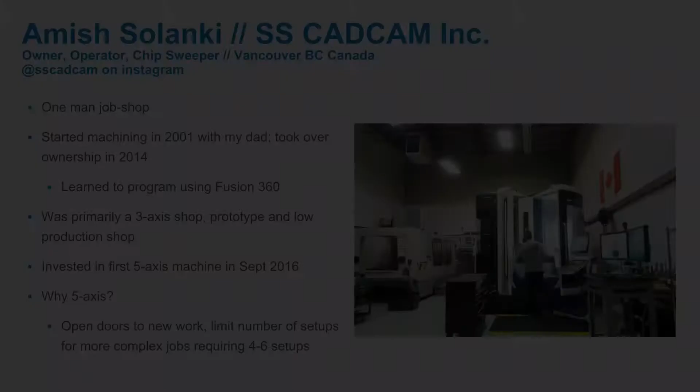I run a one-man job shop. My dad started the shop back in 2001, primarily just a 3-axis shop. My dad's first machine was a Haas VF7, which you see in the background there. That still runs to this day and is still my workhorse. I worked about 10 years with my dad. Never went to school, learned everything from him, was pretty much the shop rat. I didn't do a lick of programming.

And then I decided to take a bit of a leave from the industry. I just found the shop wasn't progressing where I wanted it to go, so I went into a completely different industry. And then after about 5 years, I came back, ended up taking over ownership of the shop, and then realized I had to learn how to program these machines. So that's where Fusion 360 came in for me. I started learning that in about 2014.

And then about a year and a half later, while running the shop, my biggest thing is we're primarily a low-quantity prototype shop. The amount of multi-operation parts that we were doing was just killing my machine time. I was just setting up and setting up and setting up, and just being able to actually get my machines running was taking more effort. So in early 2016, I decided to make a pretty big jump up, and I bought the DMG monoBLOCK, and that came in about just over a year ago.

And that's kind of where I am today. So I've had the machine just over a year. It's definitely opened up the doors to a lot of different work that I would never see, and also really been able to optimize the type of work that I've been doing in the past. So that's been a bit of a nutshell. And Phil, if you want.

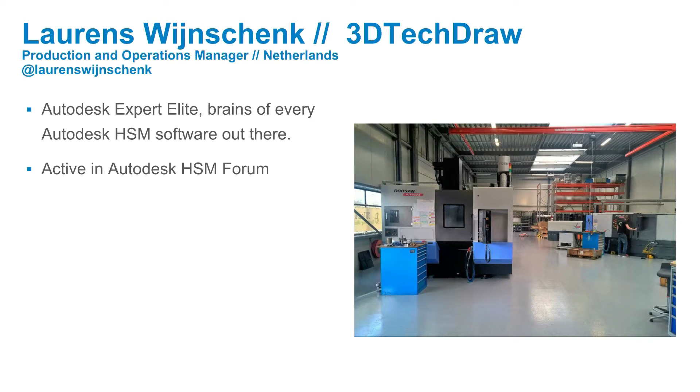We build very high-end aftermarket parts for Harley-Davidsons, and we bought our first 5-axis because everyone in the bike game has a 3-axis, maybe a 4-axis, so designs are all the same. So to really push our brand ahead of everyone, we had to make really fancy designs, and to make those designs, we went 5-axis, and that just throws you above everyone.

But mostly, as you can see, we bought it because it makes really sweet Instagram posts. It's all about the followers.

And I just use Fusion 360 for everything, for all the designs, all the 5-axis work, everything. That's about it. You do everything from design? Yeah, I personally in our company do all the design, programming, and manufacturing. So I have very long hours.

Awesome. Great, thank you. Let's... 9 minutes later. Yes? Where were you stationed? Vancouver, British Columbia. Yeah.

So one thing I try to let people know who are new to the 5-axis game is when you go to trade shows, they're a bit at fault, because every single 5-axis machine you see is moving in every single direction possible to make a hole. And sometimes I don't understand why they don't just drill the hole, but they've got to get the table moving in every different direction. So when you first see that, it is a bit daunting.

I know when I first saw it, but the more I spoke to people, the more they told me that you're generally not making the table move that much. It's primarily a positional game, and maybe 5-10% of the work requires a little bit of simultaneous work. So that's probably the biggest thing people in 5-axis are worried about.

For me, the biggest thing about 3+2, and one of the reasons you want to do it, is to lower the number of setups, saving time, and limiting the operator's interaction with the parts. In my shop, it's just myself, but I have some jobs that require sometimes 6 different setups, and if I'm doing that on my traditional 3-axis machines, which never had a spindle probe on them, you're picking up the part 6 times.

And granted, you could probe a part perfectly every single time. If you forget to lock that vise on the 7th setup and your part moves, you're starting from scratch again. So the nice thing for me with a 5-axis machine is your part's locked in. You can generally do most of the work at once.

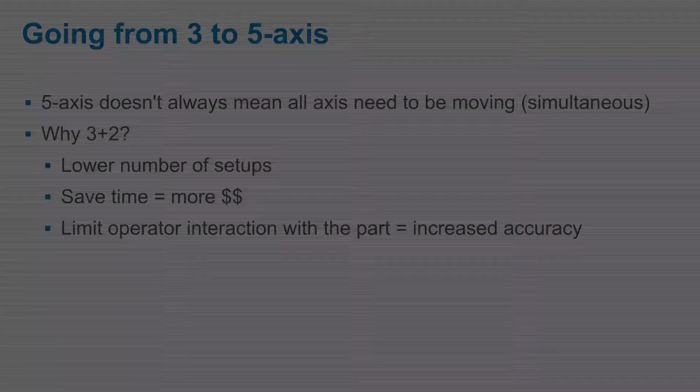If you're wondering how to 3+2 in Fusion, it's actually quite easy. In almost every geometry tab, there's an option for tool orientation, and it's as simple as clicking on a face and setting your Z from there. The machine control takes care of the orientation offset, and it's really hard to explain.

I never quite understood that when I was first getting the machine. I'm thinking, well, the table flips 90 degrees, the Z height's changing. How is that all working out?

Laurens, you kind of explained it a little bit yesterday when we were talking about the best way to explain that. Kind of when you're picking your Z offset and rotating the table, and then the control takes care of it all. Yeah, of course, most controls now just have the dynamic work offset or something similar.

For the Heidenhain controls, it's called cycle 19, and for Fanuc, it's G68.2. Most controls you buy nowadays, you can buy the option or it's built in. Most machines you buy that are 5-axis at least have that version. Not all might have TCP, the tool center point control for 5-axis, but that one's in most any machine now.

So orientation is all standard in Ultimate? That's a good, yeah, it's not non-standard, right? Yeah, it's just in Ultimate now.

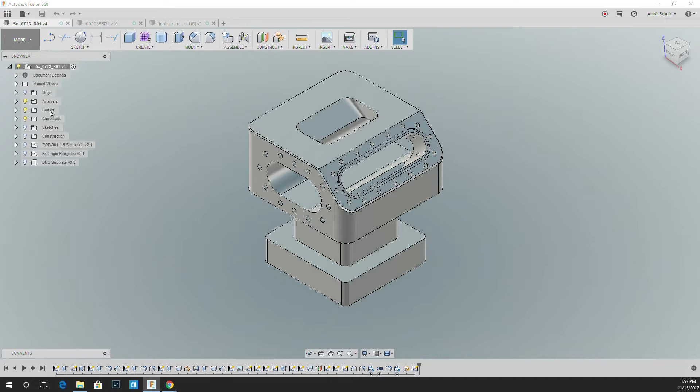A lot of issues I've sometimes had is trying to get into odd angles. I'm going to go to Fusion here quickly and just show a basic part to give an example. I'm working kind of backwards here. My Space Mouse was rolled upside down.

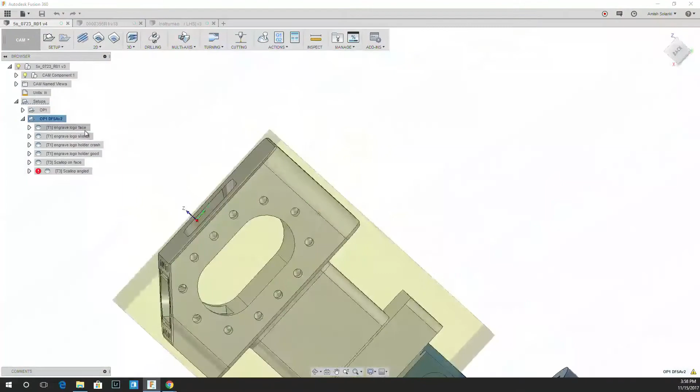For example, if you were going to engrave this logo here and rotate the table at 90 degrees, I'd be using a ball nose, and for me it's not ideal to use a small ball nose right on the tip of it, so I'd like to kick the table over a certain number of degrees. Common practice is really just to create a sketch if you wanted to use a different angle. I created a sketch here on this plane, and for this logo I've used my tool orientation.

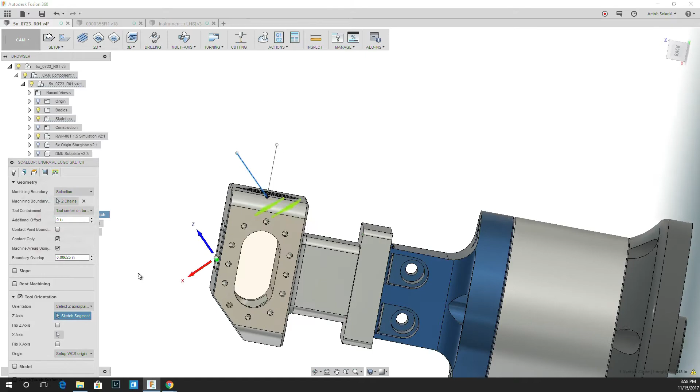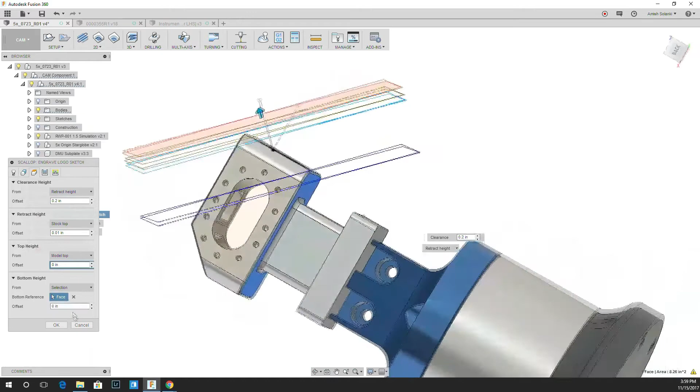I'm going to move this on this side so I can see it better. So you just pick your Z-axis. Normally you'd pick this top one here, and you can see the Z-axis pointing at 90 degrees. But if you wanted to use the side of the ball nose, that's the sketch I would pick, and then just press OK. It's just going to process, my laptop's not the fastest. And that puts the tool at an angle.

The problem with that is if you have a part that requires you to draw a lot of sketches, I find it takes quite a bit of time. So my tip is I've created this almost star globe, and I've used it quite a bit. All it really is is a bunch of different sketches on different planes, I'll turn them all on here. It's positioned in lines in almost all directions that you need, so you can choose the one that you need.

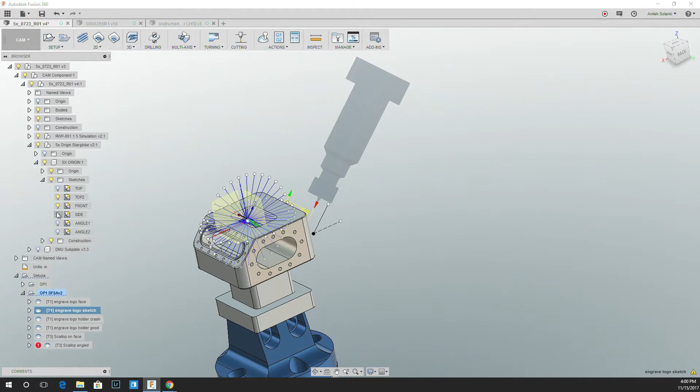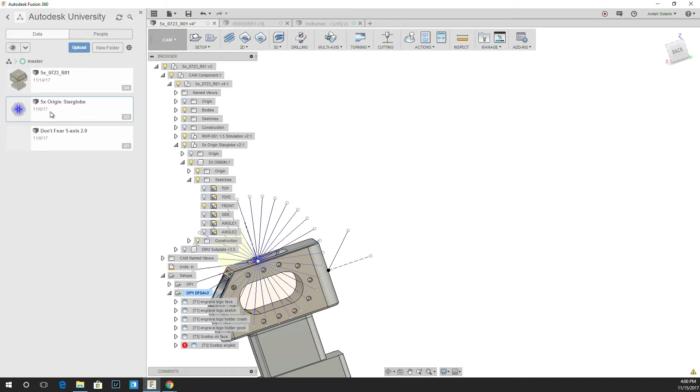I'll zip down here and turn on the front one. Is that a linked part that you inserted? Yeah, exactly. I've pretty much created this one model, and that's what makes it quick for me. I just import it right inside; it doesn't need to be in the middle of your part. I just put it anywhere, and I find it makes it extremely quick for me to pick an angle.

So if I simulate this one here, you'll see I picked this angle, and the tool holder ends up crashing into the part. So it's really quick just to edit, pick the next sketch geometry down, let's try that one there, and then the tool rotates away from the face. So that's my little tip that I've used quite a bit.

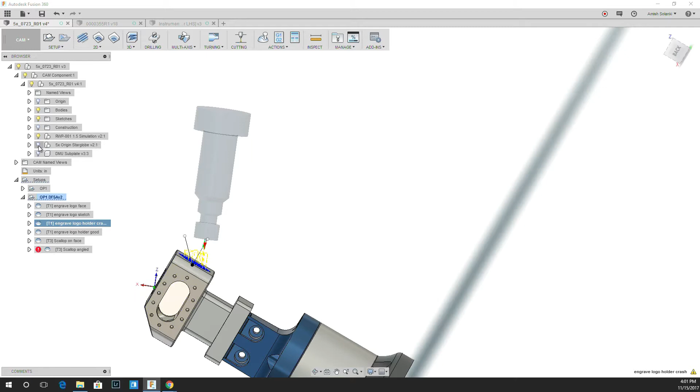I had a very similar option for doing these radiuses on the back side here. I'm not going to show too much of that, because Lawrence is going to show some neat 5-axis simultaneous work on the back of that part. So I will head back to, yes?

Not really, as long as it's not like directly down from me. 15 degrees is even better. It also depends on the size of the tool that you're using. Yeah, as long as you're not kind of directly down. I mean, you do a lot of small tooling, right? Yeah, 15 degrees is like... Yeah, exactly. That's kind of the big thing that I use.

On a small tool like that, I don't know, what do you think? 5 degrees? It also comes down to your clearance and stuff, right? Like if, for example, if you're trying to go on the back of that wall there as well. Yeah.

I'm just going to show a couple examples. These are strictly 3+2 examples of parts that I've done in the past. This is actually one of the first parts that I think I did about 2 or 3 months after I got the machine. I'm actually pretty good friends with the Sandvik sales rep in Western Canada, and there's a local aerospace company that uses a lot of their face mills, and this one they specifically wanted, but they wanted it with through coolant capabilities, which Sandvik doesn't do.

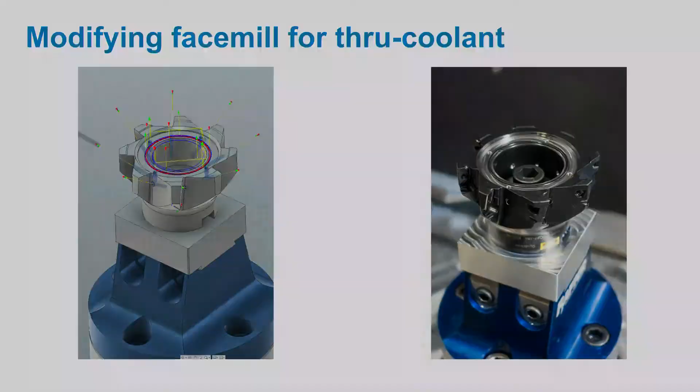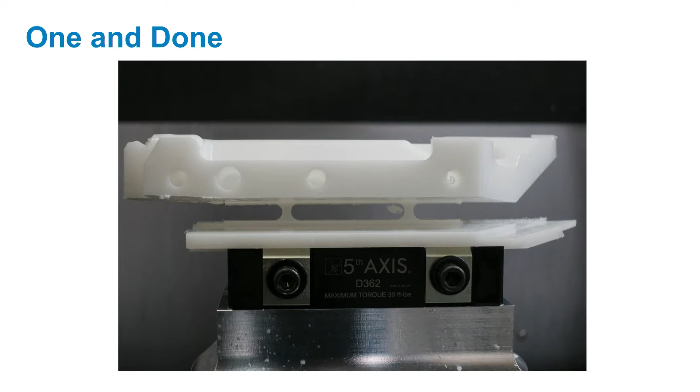This is the job that I did for Boeing. There was quite a bit of these plastic parts that's used on their wing spars. These clamps come together and they inject like a polyurethane through those holes that compress on it, and then these clamps come off. Unfortunately, I can't show too much of the part, but there is quite a bit of surfacing on the top and on the back side, and there was about 40 parts and every single part was different, so I didn't feel like doing work holding for every single one. So this is almost a kind of a one and done part.

Those tabs were created using the tab function in Fusion. When I cut off, the back side wasn't important, so I was able just to clip it off and then use some sandpaper to kind of finish off the back side. Again, a fairly simple kind of work holding strategy, but for a fairly complex part that made it pretty easy for me.

This was some aerospace panels I did, which can't be done easily on a 3-axis machine. You can kind of see there is a chamfer part here, and then this is the part flipped over, and then the inside was chamfered. It made it easy. I didn't have to surface those in. Actually, a nice thing is when you're doing deep pockets like this and it fills up with coolant, you can tilt your table and get the coolant out, which is actually something that's quite nice to be able to do. Even just getting all the chips out if you wanted to, for finishing the part off.

So these were actually for a Sikorsky S76 instrument panel, and these are the lower panels. That's the finished part there. The bigger main panel was done on my VF7. That was about a 15-hour runtime on that slow machine, and there was a bit of surfacing on the angle on the far part right over here. I think I don't have it in my slide, but this is what my customer sent me, and that's the finished part there. So the two lower panels are down here, and then the main panel up there, which is kind of neat.

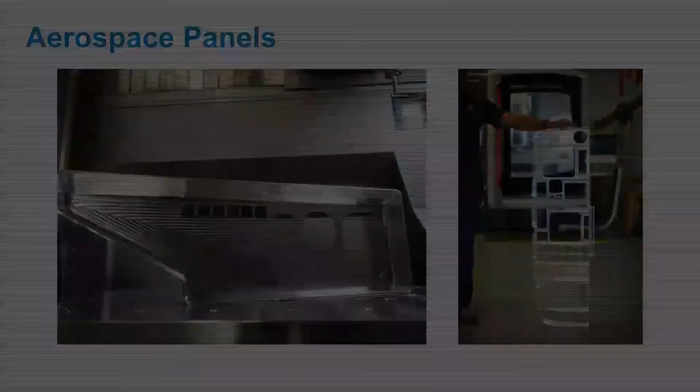So again, going back to the small parts, they're nothing absolutely crazy, but just not having to surface that chamfered wall saved me quite a bit of time just taking an end mill to finish that off. And the work holding on that part was pretty much just a sub table that I made, and then I did all the fixturing primarily with bolts and some aluminum clamps to hold it for the second operation.

So yeah, that's that part there. And then these are some large molds that I made for the fuel cell industry. They were being done in another shop, and then they changed the models for them. And then the customer came to me. It started with a fairly large slab there, which is dovetailed, if you're wondering how it's held.

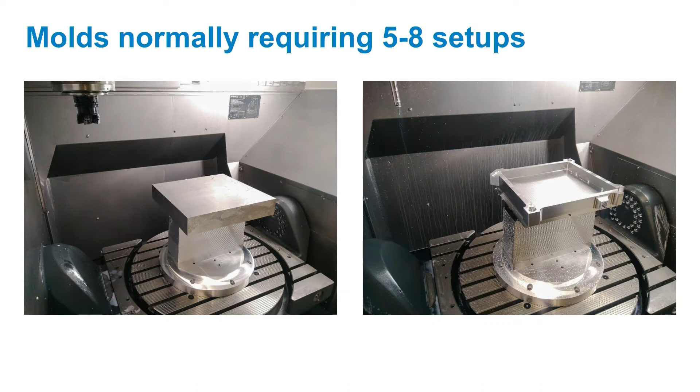And then usually I think it would be about 5 to 8 setups to do, not that part, but there's the bottom and the top part of the mold, and you can kind of see on the one mold there's quite a bit of fixturing around the side, and you can see all the toolpaths around the side of it. There's even chamfers located on these clamps on the side that if you were to put on a 3-axis machine and hold it up, you'd surface them in. I was able to obviously tilt to the right side.

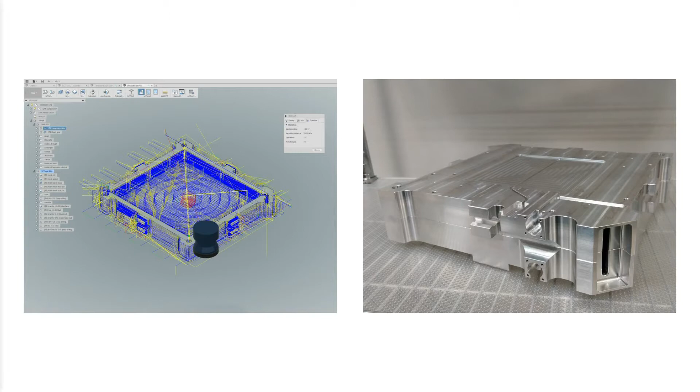Let me pull this up here. This is just to give you an example of how quick some of the chamfers were on all the sides. And I'm running real time here.

So again, I didn't do a big quantity of these parts. There were about 6 of them each. I think the total runtime on them was anywhere from around 2.5 to 3.5 hours to complete. But once it was programmed, it was nice to be able to set it up and then go home and take a nap and then go back to work again. So,

and then this last part, I don't know how many of you follow me on Instagram. This is a winglet that I had to design for unmanned aerial drones. I actually got one of the parts here. I'll pass it around. Just be aware it is quite sharp on the back side here. It finishes off at around 4 thou, so it's got a sharp edge, so please don't cut yourself, John. And this was quite an interesting part.

In the video I posted on Instagram, I do show some 5-axis simultaneous toolpaths, but that part was actually done completely in 3+2. It was quite tricky, at least for me, figuring out the work holding for it. It was done out of a solid block. I had to eventually break the part off, and you'll see it's quite a surfaced part.

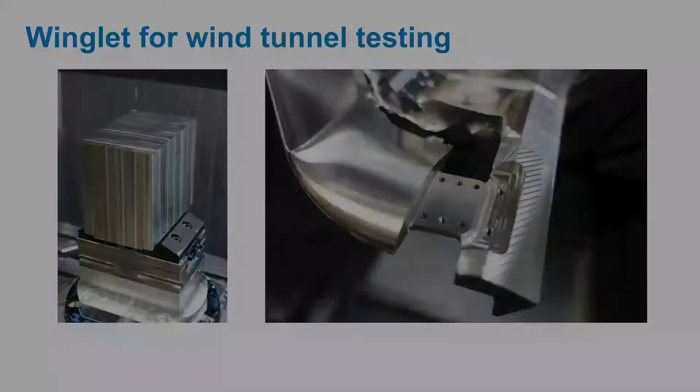So what I ended up doing was I left a bit of the material on this side here. These were 2 threaded holes that were in the part. But this side here was actually curved, and the back side was flat. So I ended up just cutting a piece of aluminum on the back side that I bolted onto the part. So when I machined the back side, it was still supported. And so that side was, in a sense, completely machined off, but still supported. And then I machined the last part of the tip of the wing off. So again, fairly complex.

Have all of you seen the video on Instagram, or probably not? Yeah, it was kind of an interesting little part. So there was left and right. This is not how they manufacture the part at all. It was primarily just designed for them to put into a wind tunnel test. And then I'm not exactly sure how they do the final manufacturing for the part. That's stuff the Army doesn't usually want to tell you.

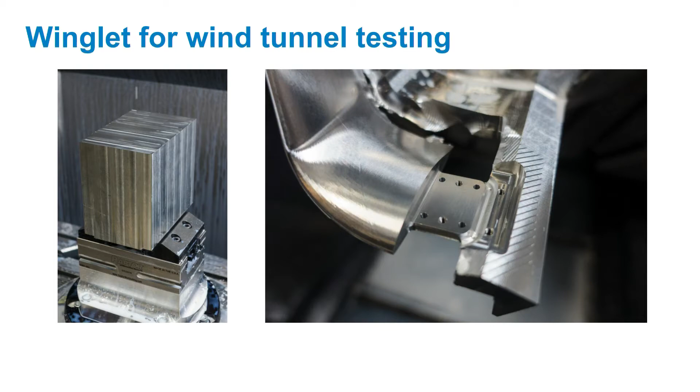And that's it for me. Phil, you want to go? Yeah. So we'll bring your stuff up here. I don't know how this works. Press it down to continue. Yeah. Oh, fancy. There you are.

Yeah, so I'm just going to talk about some of the work holding I use for 5-axis stuff. I'll start with basic things: vices, centering vices, standard chucks, fixture plates, and clamps, and then I'll go into a little bit more. This is just a simple lathe chuck. Everyone's got one collecting dust in the corner of your shop that someone probably crashed on a lathe. So I use them for mills. Great, simple. Next, just a standard vise.

This is actually a part I designed, and I didn't actually realize how big it was until I ordered the material, and then I realized how small my machine was.

And if you're wondering, the corners, when it rotates, do clear the probe by 50 thou. So I lost a couple years of my life on this one. But you can see, you can throw, if this even works.

The material was 6061 aluminum. It was 24 inches by 12 inches by, I think, 5 inches thick.

How on earth do I do? You did not share with me. What? Yeah. How do I share it with you? Not sure what you've done here. I've never used PowerPoint or Google Slides before, so. Oh. You know what? You're going to have to give me access from your account. Yeah, whatever. Figure it out. Let me move it over. Okay, well, I'll come back to videos. Oh, no, that's fine. Oh, jeez. Why don't you come back to your videos after? Yeah, I'll figure everything else out, and then we'll come back to the fun stuff.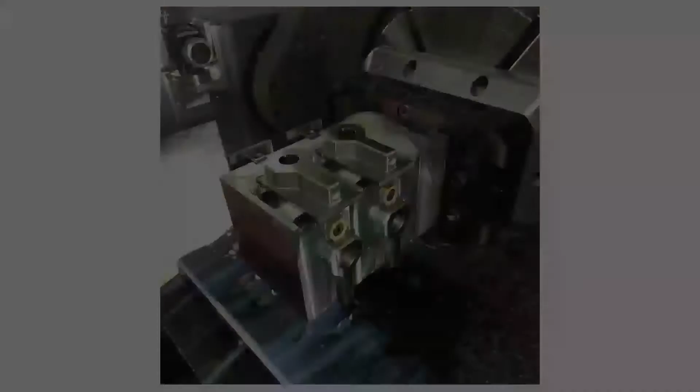And then there's just standard Mitee-Bite fixture plates, pretty standard 3-axis stuff, but if you have a 5-axis, why not just rotate that 4 or 5 times around like a tombstone, and then just make a small one you can hold in a vise. So this is just fun, creative stuff I like to do. And that way, you can get all the way around it, do your 5-axis work, and it looks really cool.

And then this is just your basic clamps. We made a wheel, this is all very basic stuff, but you gotta get stuff done.

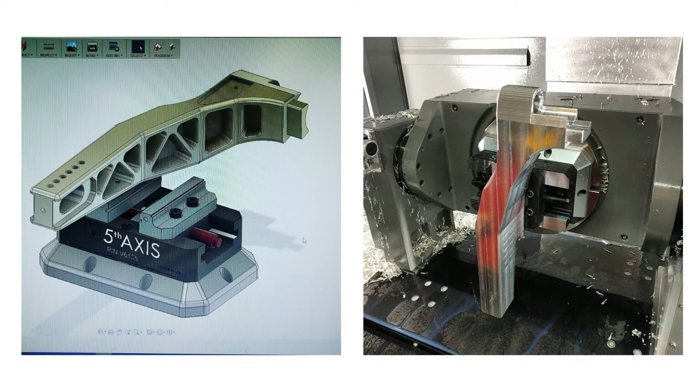And then there's dovetail stuff, classic 5-axis work holding. You got dovetail vises, the little fixtures, and then multi-part fixtures that I love to do. So this was actually one of the first things I ever ran on a 5-axis. And this just shows kind of the power of dovetails. This is a rather big piece. That's 21 inches long. And we held on to, I think, a 1-inch dovetail, 80 thou thick, and did the whole thing all the way around. And there's no chatter anywhere, which was mind-blowing to me.

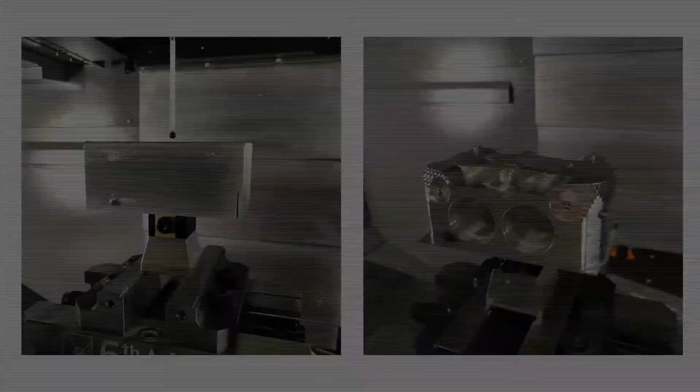And there's just another example of just a small dovetail fixture. It's just a 1/2-inch one from 5th Axis, but it shows you this is like, I think, a 6-inch wide piece, holding onto just a 1/2-inch dovetail, and it's the same. That's not chatter, just so everyone knows. So you can do big pieces holding onto barely anything, and surprisingly good results.

And there's another. And it's just showing, if you look around, you can get all sides. That's one I made. Oh, that's this contour of multi-axis tilting. I use it for everything because it looks cool. And then I can tell people that my parts are very expensive because they're hard to make, even though I don't need to use that toolpath.

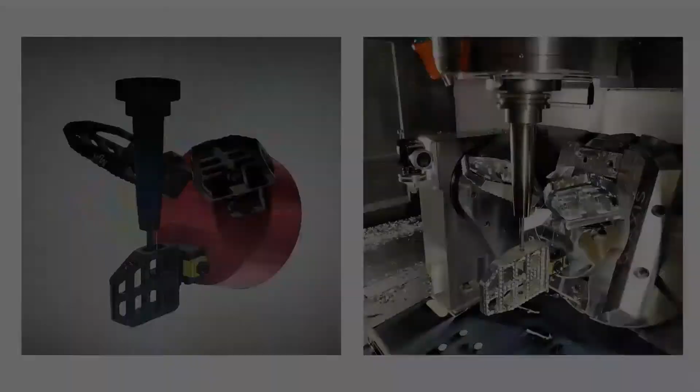And this is, I don't know if people have seen on Instagram, this is a big one. Yeah, I like to make things complicated to keep myself entertained. So we want to try and make as many of these pegs as possible, but I have to get all 5 sides on this design. For some reason, I designed it that way. So we have to use the whole travel of the machine from 0 to 110 degrees. So I had to design a little plate that could hold all my dovetail fixtures so I can actually get around everywhere, and they're spaced out enough I can get tools through.

Oh, it's just another example. You can do multiple parts on 5-axis and still get all the way around. And they're the same thing, different style. And I got 4 pieces, and I can still reach 5 sides.

So you made your risers yourself, correct? I did. I made risers myself. How do you decide on the angle to put your dovetails? So the angles I put the dovetails on a couple of those, if I go back, that was just because I thought that angle looked cool. On this one it's because I actually had to get to all these odd angles. Because I can only go from 0 to 110, I had to angle these just right. So at 110 degrees, I can finally hit my final side.

So not being familiar with much of the programming stuff, you're able to do all that on-screen dry run, kind of like what you've shown us. You can see obvious conflicts, just run through a process which will tell you there's conflicts? Yeah, you can. So in Fusion, I model up everything, and I make the stock for all these, and then I just component pattern my CAM, and then I run that through simulation, and I can see if it's going to hit anything. Though sometimes that's not true.

I know. Oh, I think that's... I'm not sure, but I think that's only on the post side. Yeah, I don't think you can really. Yeah, I don't think until it actually makes the machine thing that we're talking about, or machine definition, you'll see that.

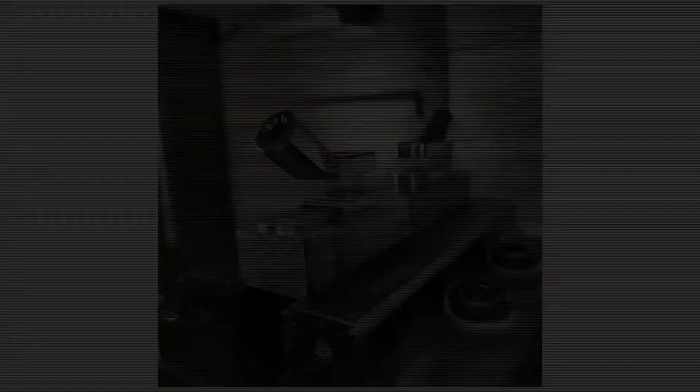And then this stuff is so much fun. One and dones, tabs. I use it all the time on prototyping pieces that are within a certain size, which is scrap material I have. And you can make the whole piece in one operation, and I don't know why, that's just so cool. I just love it. So like this, these are just cool little tabs, some scrap material I had laying around, and I machined these down. I think those were 10 thou tabs. This is the first time I've ever tried it, and it works perfect. Machine the whole part, then at the very end you come and just cut your tabs, then break them off.

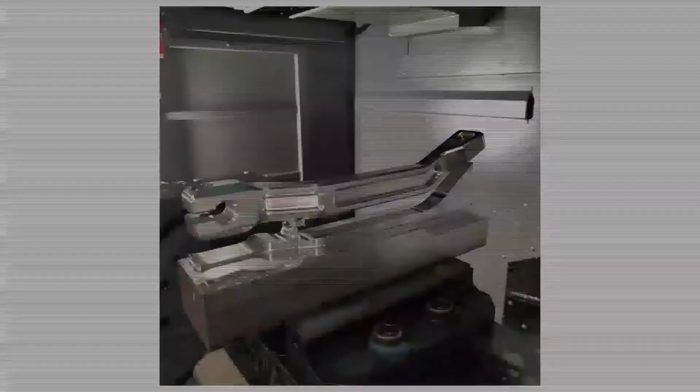Are you hand finishing those after then, or? These ones actually had an op 2 because it was contoured on the bottom, so I had to flip those over. But parts like this were all done. This is just a prototype shift linkage we did. So you machine the whole piece, every side, all the 5-axis stuff. Then I came in, knocked this side out, then this side, and then just made my tabs so they were a couple thou. Cut it right off. And there's another video you can't watch.

Well, I think that's how most companies would, but myself and my business partner are ideas men, and we like things in our hands right now. So we'll usually design something together for a couple hours and then spend the night machining it. And if we don't like it, then we'll do another rendition, but normally it comes out pretty good. I know usually prototype pieces take a couple days, weeks. I try and do them in hours because I want to make this piece and then move on to the next piece. That's why I think we have 30 products we've made this last year.

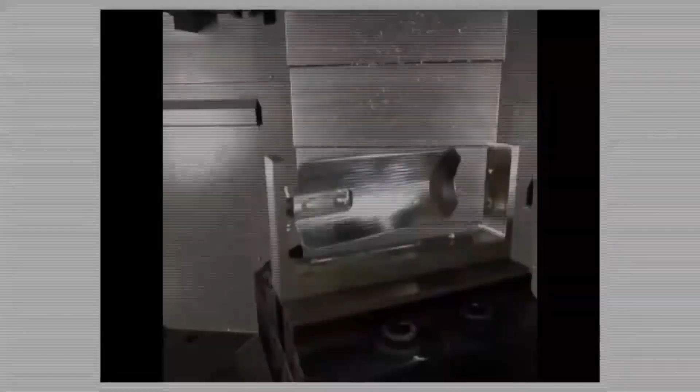Not all of them have sold, but you know. There's another video you can't watch until I figure it out. And this, when I do figure it out, you'll see this is a pretty thin piece, and then we finished it off with a 4 thou tab. So it's just wobbling in the wind.

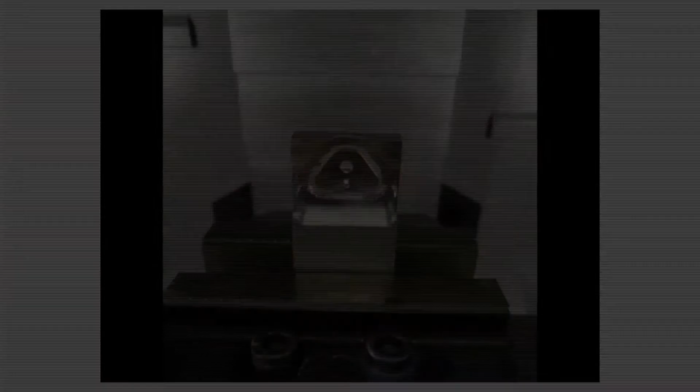Extending the question, design and the file. So when you design the part and you have the file, is that yours or is that the client's? Who owns the... Oh no, these are actually my products I sell. So I don't take outside work. This is my own little micro factory. I design everything, make it, and then I sell it. Okay. Yeah. That's very different than what I was thinking. Yeah. I'm more a job shop.

Yeah, right. Yeah, exactly. So for me, customers send me generally a drawing, and if I can, get a 3D model from them, and then I send them a quote, and then if they go ahead, then I make it and send it out, and generally never see it again. Okay. Usually, when you don't see it again, that's a good thing. Yeah, it's true. When you don't see it again, it's good.

Yeah, usually if they send it back or you get a call about it, usually it's wrong. So if you never hear anything, usually it's fine. There are times where they make a mistake, and they want you to fix it after. So there's certain times when that does happen too.

So all right, into simultaneous. Probably get my computer set up for that. Most people think this is complicated, and usually we buy software that is pretty damn expensive just to do small 5-axis stuff. I wanted to actually just show what we can do and what is in the future. So I'm going into Inventor HSM, because one of the features that will be released in Fusion is Flow, which is in HSMWorks already, but it will be in Inventor HSM and Fusion as well.

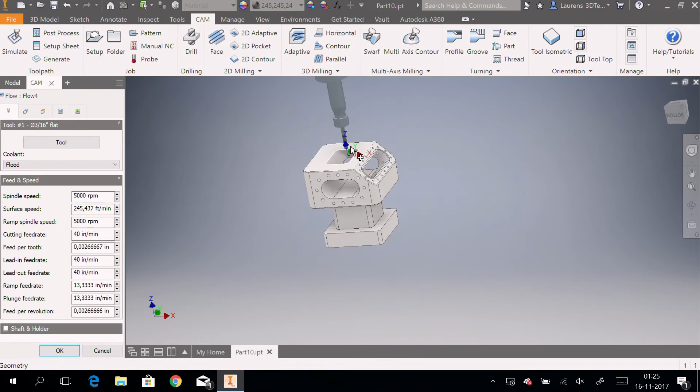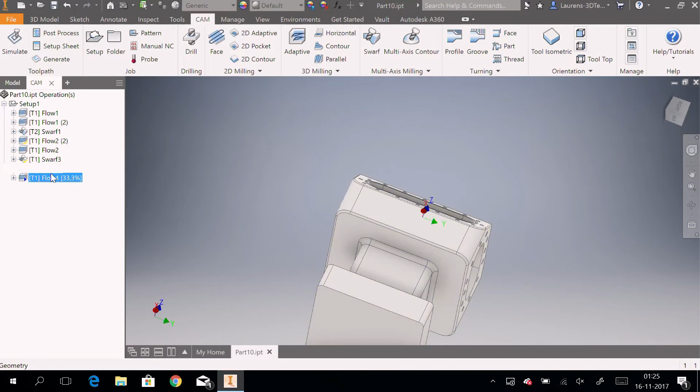And what we would do in this case is just select the same face that he actually machined in 3 axes. Pretty simple, we just tell it how many step overs we want, tell it to use multi-axis, and we should be able to just hit go and it would calculate a path for us. One thing we would run into now is that the tool would actually be touching the back face, which you probably have machined in another way already, which causes it to not look good. Let's see if it calculates quick enough for me to actually show this.

Now the fun starts because it's not doing it, as usual. What? Change it to if possible to show that; if possible, it makes the toolpath a lot faster. Yeah, fair point. But I didn't need it, tested it this morning. So what I actually do is now set the minimum tilt to 95 degrees. Because at 90 degrees, we would be touching the back face.

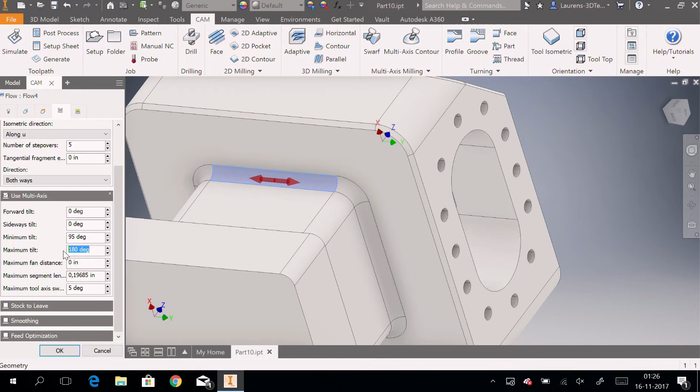And at 95 degrees tilt from the original tool orientation we got, which you see is the Z-axis here, it should actually allow us to machine the whole fillet, but be at an angle of at least 95 degrees. Of course, the machine can't do 180 because with your A-axis you would be milling straight through your own table. So what we'll fill in here is 110. And let's see if we can get it to work that way.

Because I've got the same thing right here, I think so, which will actually just show you that in full 5-axis mode, it would go there and machine this radius. It shows that it will be colliding with the stock right now because I didn't pre-machine any stock right there, so it shows in red because it's actually moving into there.

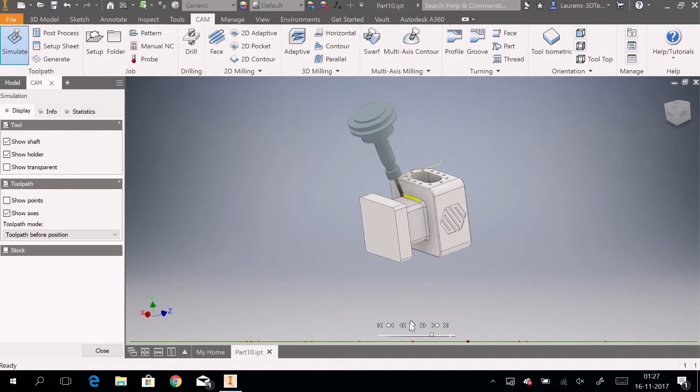But you actually see the tool move its angle, because in the beginning, flow always wants to cut with the center of the tool. So now we're limiting it, and it will try and come as close as possible to that. But it will still machine the whole fillet. It will turn in case it's not possible. So what you actually see here now is just the tool moving around so it can machine the whole fillet.

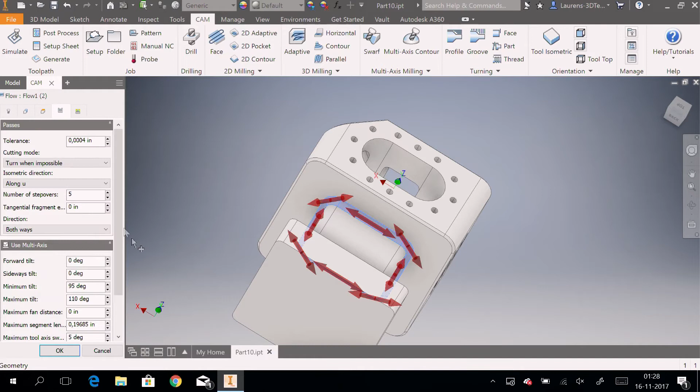Then the next thing is you're going to say, why can't we do this around the whole part? And the answer, of course, is yes, we can, because that's the next thing we do. If we select all the faces that are around this part, like this, we still have the same setup, 95 degrees and 110, and we actually get a toolpath that goes around the whole part.

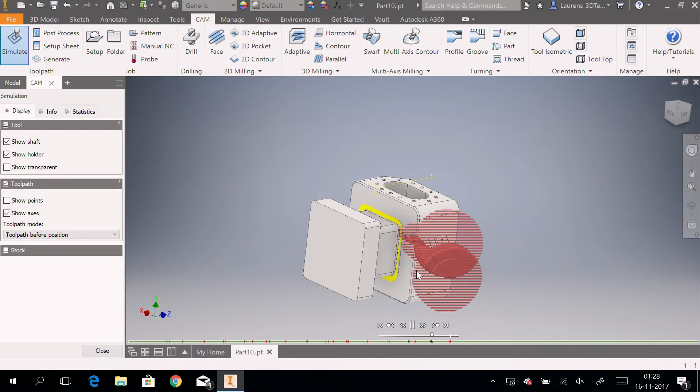It's pretty easy to set up, and it feels complicated to do this full 5-axis, but actually it is like 1-2 minutes and you should be ready to go. Whereas if we do this 3+2, we've got to do a whole lot of different operations to get around the whole part, which would actually take more time setting up than doing it just the 5-axis way.

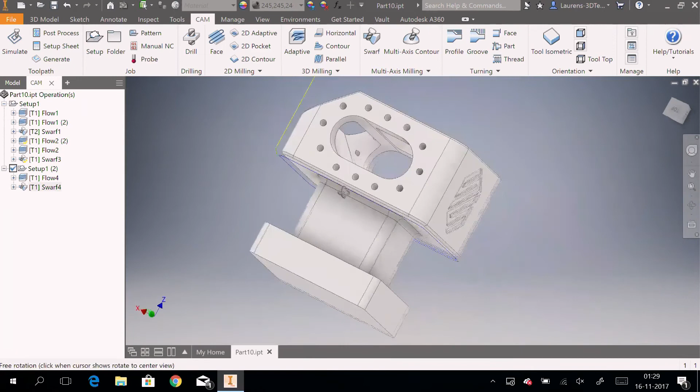The same goes for this back chamfer we've got right here. If you have this in the machine and you want to do it 3-axis, it's going to cost you quite a lot of operations to just go around the whole part. Whereas if you just take a swarf, which I'm going to set to contour pairs just for the sake of being quick in calculation, we select these 2 back lines, hit OK, and we already see this being calculated. Hit simulate. Actually see it moving around.

One of the issues that we do have now is that it would just touch exactly on the bottom edge that we selected, which means you'll probably see that in your part. So there's a setting for extending your tool below that. This is the tool offset, which we'll put at 1 millimeter, for example. Since I'm from the other side of the world, I live in the metric world, so for me a millimeter is easy. As you can see, you can just fill it in. Even if your part is in inch, you can just fill in 1 millimeter and we'll calculate it for you.

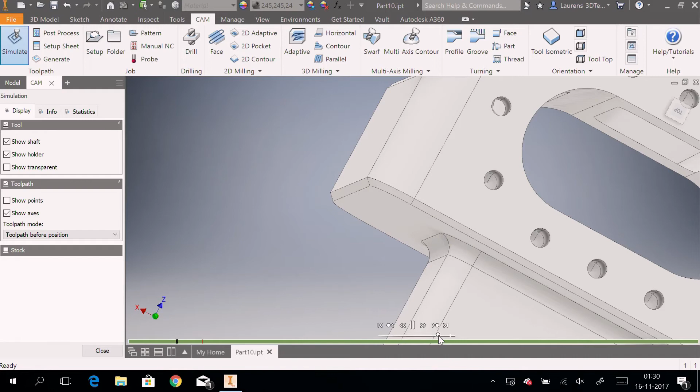So that's one of the things that works great if you're working on someone else's parts that came in the wrong system. It's always wrong. But now you can see it's actually cutting below, and it's a 1-minute job for cutting the whole chamfer 5-axis simultaneously, where it really would take a lot of time doing this in a 3-axis way.

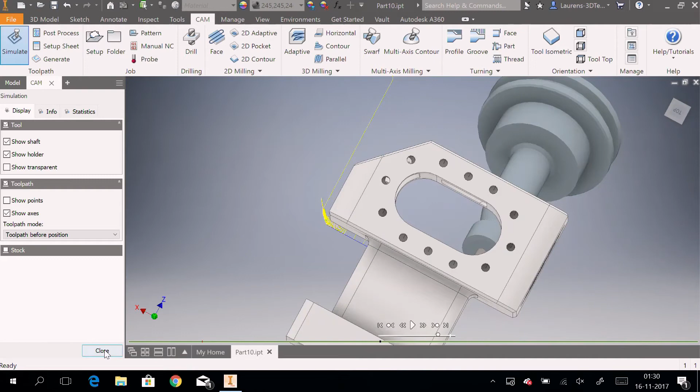One thing you might run into the first time you try 5-axis is a toolpath like this, with all the different little movements in there. Keep in mind that usually with a flow, the system will make sure that the tool is not cutting into the model, but it doesn't really care about your holder. You can tell it to trim those passes where the holder will run into the part, but you can't tell it to move the holder away. In flow, at least, you cannot. You can, for example, in a multi-axis contour. That's what Phil uses most of the time, where it actually tilts away so it is clear of the holder.

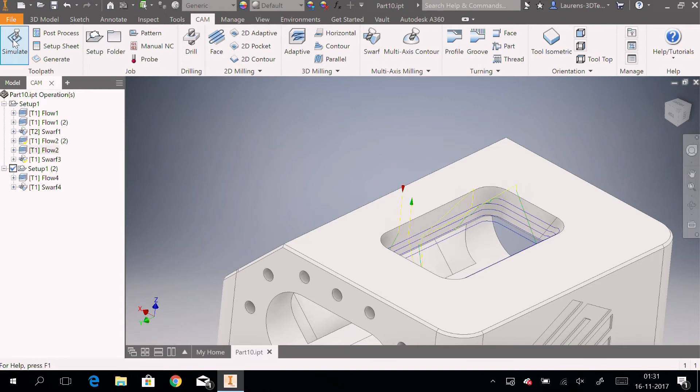It cannot cut with the center, the bottom part of the tool, but it will cut with the side actually at the same point. So if you see the same path now, actually it looks like a pretty decent pass, and you can actually make this thing, whereas with 3+2 it will be very tricky to have a lot of setups or a lot of operations to actually cut around it.

It almost looks like you could have done this with swarf, but it seemed like the surface didn't actually allow for a decent sized tool to actually cut around it. So I'm just trying to show that pretty easily you can just machine it. Question for you: the toolpath, you see it, it's almost like making a linear move down that straight face at that sort of angle.

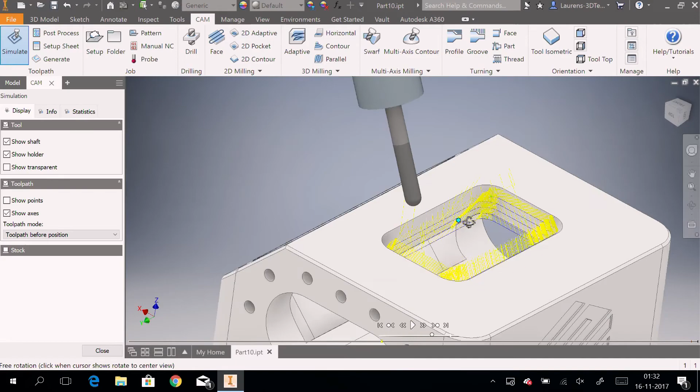With that noise in there, is it generating many G1 line motions in that toolpath? Yeah, what line did you mean? I mean, full five axis, we're always going to be in just line motions. There's not going to be circular motions anyway. But depending on the tolerance you use, you'll get more or less noise, of course, in your tool angle.

The trick is with a ball end mill, you usually don't care as much about your tool angle because you're cutting with the bottom side or with the side of the tool, and we don't really care if the tool is a little off in angle because it's still the same kind of geometry you were cutting with. But when you're running a swarf operation, for example, cutting with the side, there you really have to take care about your angle, because if there's going to be noise, you'll really see that in your part.

So for that, I would usually recommend going for a very tight tolerance not only in the operation, but also in the surface triangulation. I'm not sure if any of you joined Rob's class on this, but we spoke about it real quick, that if you change the surface triangulation, you can get rid of a lot of the noise.

In this case, for the swarf, I used just contour pairs. So I told it, this is the bottom contour you've got to follow, and this is the top one. So it doesn't really care about how the actual model looks anymore. It just looks at those two rails and machines those. So for that, we're not getting a lot of noise because it's two actual rails it will move along.

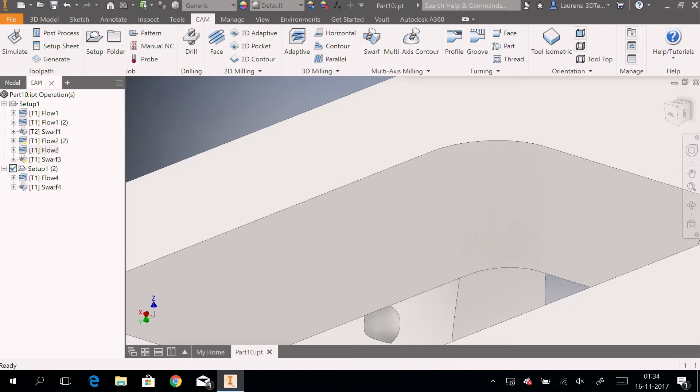Yeah, these yellow lines you see, you can just turn them on and off here, the show axes. Those are actually the lines that the tool is angled at. I use it a lot for 5-axis just to have a feeling for how they're distributed, and if there's a lot of motion in the axis, because if there's a lot clustered, you'll see that there is a lot of motion.

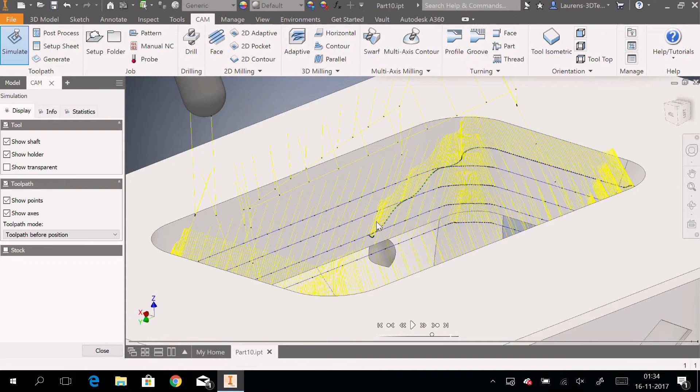And for this, like here on the straight, you know there isn't going to be that much. So if there is something there, you instantly know something's going wrong in the calculation. I've got noise or I've got issues there.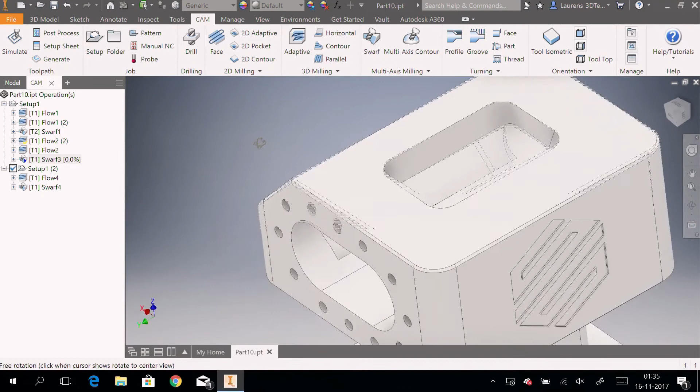Is there a spiral to go down there if you wanted instead? For example, if you take a swarf, here we've got different modes. You could just say spiral from top, and let's see what this does in this case. I haven't got a feel for the inch length. All right. Yeah, it should be a little bit more, 25.4, something like that.

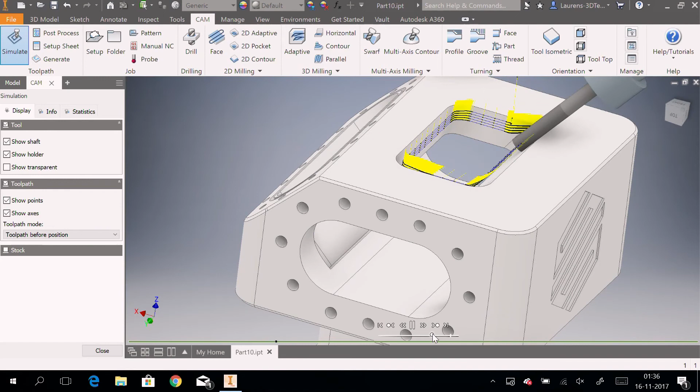So actually, you've got a motion like that, which should cut in some kind of a spiral with the side of the tool in this case. You could also have a swarf and give an angle offset, so you're not totally cutting with the side, but in the end you are more surfacing again, whereas with a swarf you usually try to be cutting with the side of the tool and have as much length to finish in one go. But you could just do this kind of spiral motion downwards.

Tilt off the side? Yeah, with the swarf you could also just tilt it off the side if you wanted to. Here is the sideways tilt version, and you could just give it an angle you want it off of the actual face you selected or the two guide rails.

Quick question. Is this the fastest strategy for this part? Because to me it looks like you could just do a Z ramp down this one. Yeah, it's not straight down, it's tapered out. If you see it like this, we cannot see the actual... You can see it like this. I just didn't see that it was tapered out. Yeah, but if you look at it like this, there.

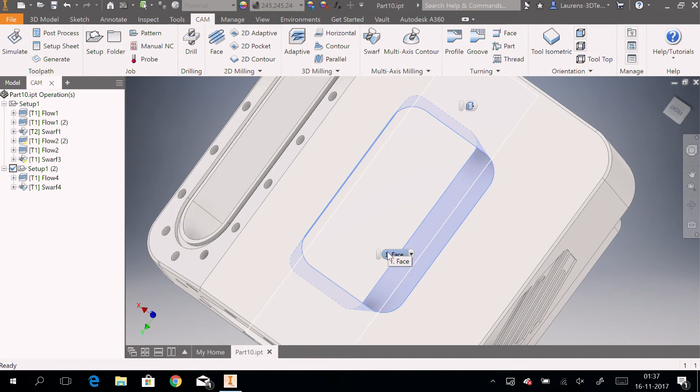Quick point: if you use a side trim, if you use a lollipop cutter, the 3D contour will measure the geometry. If you go undercut it, right. Calculation-wise, this always takes some time, because the calculation of the toolpath will be done multi-core, and the tilting too, I believe. But the linking is usually done as a single-core operation, and that's fine. But for the tilting operations, there can be very tricky linking moves, and it's got to try. So it could take some time.

Usually with the full 5-axis operations, you get a good toolpath quick. If it takes a long time, usually something is wrong or you'll see noise somewhere. But with the 3D operations and tilting, if it's undercutting, you might be waiting for a pretty long time. But if you've got a lollipop, it will still see that it can go there in a 3-axis view. And then in the tilting, you tell it to stay off of it more, and you could even use a normal ball end mill if you wanted to, which I've got some videos on my Instagram doing exactly that.

Is that it? I can throw some videos on if you want to see. Custom profile tools? Not yet, sadly enough, but it's one of those things that I would like. On the other hand, for like 90% of the stuff I do, I can use what we've got. And from what I know, most people are not really into 5-axis simultaneous anyway. We see it in the Netherlands quite a lot because labor is very, very expensive. So we need to do crazy stuff to have a chance of surviving as a job shop.

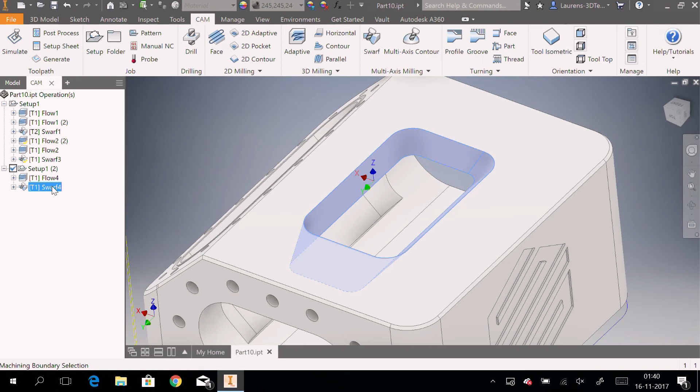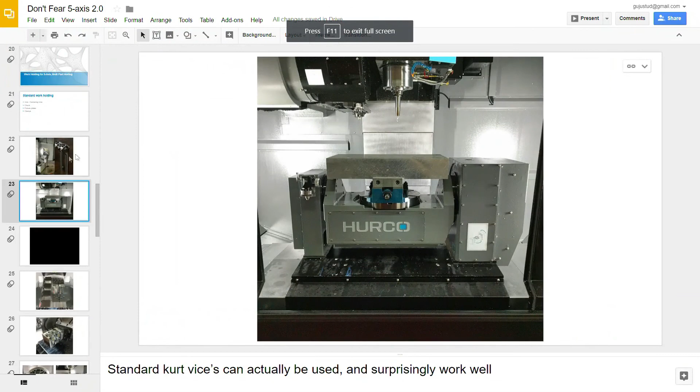I'm going to switch it back quickly. Yeah, fair point. You've got to wait a little till it changes. Yep. There we go. Presenting. No, I would just play it this way. Probably easiest. Okay, now that all the boring stuff's out of the way, we can go back to me.

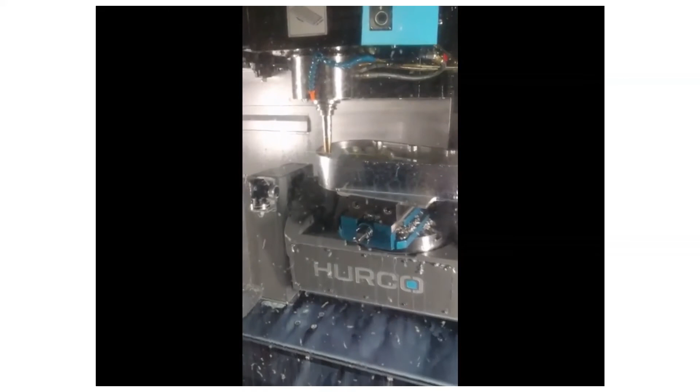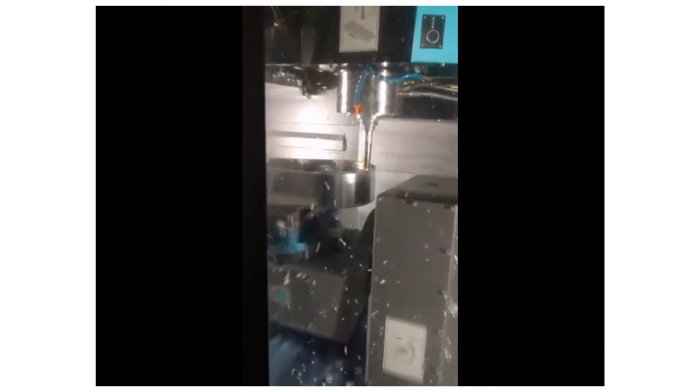Come on. Yes. So you can throw these Kurt vises around pretty good. And so I measured to make sure that stock was not going to hit the trunnion or the probe. I didn't remember to make sure it wasn't going to hit the side. So the first time that whipped around, I thought I was going to have a heart attack, but it was fine. Not by much, though. Not once. Yeah. Blah, blah, blah. All the fun stuff.

And that was half the swing arm we made. Again, just full 5 on a pretty long, wide piece, holding on to almost nothing. There was no real reason I needed that toolpath other than I was working 18 hours a day and I wanted to be entertained. And our Netflix wasn't hooked up. Yeah. Watch that one. Skip these boring things.

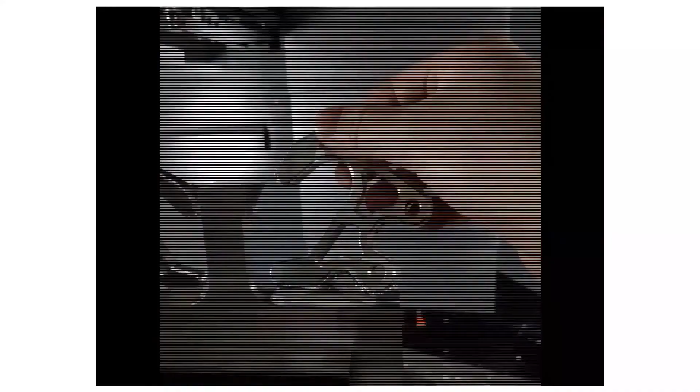And there's just a little tabbed part, not quite a one and done. I machined the chamfers on both sides, but I left the piece about 10 thou bigger, so I could put it on a fixture, clamp on the inside, and then finish the outside. And here's that 4 thou thick tab we did on this. That's right off the machine, just very loose. I think I measure it here at some point.

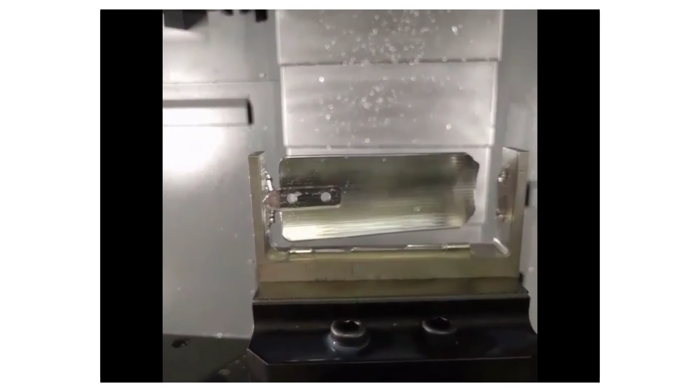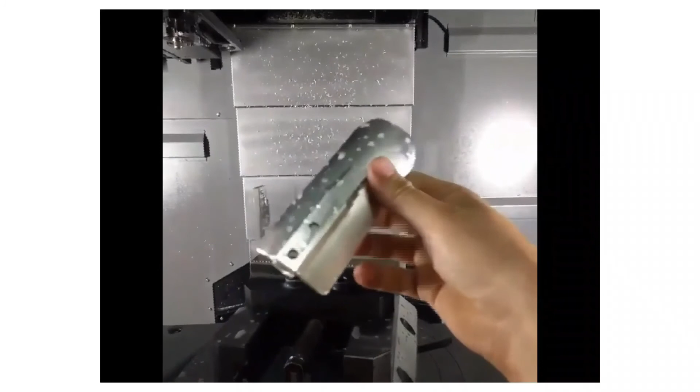Yeah, I had to make a little model to go around, so I knew exactly where I was going to cut. And there it was on the bike. And there was another one. Just a little guy, I could poke it out. That's so nice. And then straight from that onto the bike or onto the part we were making. And it was done, one op.

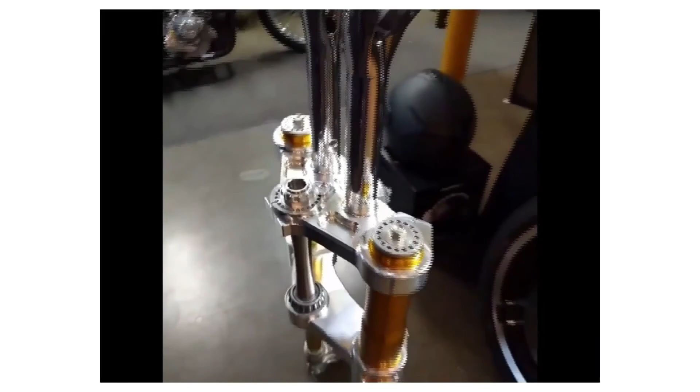Do any of you guys have any experience with any other 5-axis programs like PowerMill or any others, and how would you? Okay. I've opened up PowerMill to take a quick peek at it, but I haven't given it enough time. Most of the work that I'm doing that I kind of showed, it's primarily 3+2. I've seen demos of PowerMill, and there's options in there that I think it's got machine dynamic control, which is pretty much a faster way of like that star wheel that I've done, just to be able to tilt your tool. I'd love if that came to Fusion now, but yeah, I haven't used it.

I haven't used it a whole lot myself. Lawrence, I don't know if you played around. No, I've kind of looked at it, and then was like, I can do like anything I want with this. I'm not saying it's faster to do it this way, but I've kind of gotten used to it. So for me, a lot of the stuff I can actually do, and usually when I take the time, the code that comes out is pretty decent. So not much complaining there, but I guess Rob has used like anything on earth by now to actually know what's going on.